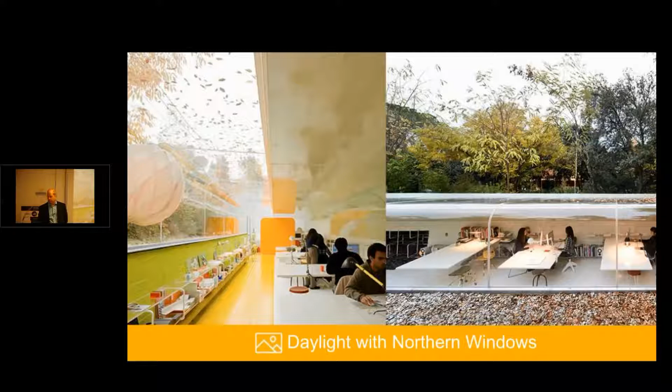If you employ it right, you can still get views. This is a case in Europe where people are able to work here most of the year without any glare, because the windows here are facing north. They will get glare at selective times in the year, early in the morning in the summer, later in the day in the summer. But otherwise, you can plan for it and also achieve a lot of benefits of the views.

So it's important to actually go beyond just saying we're going to add windows and skylights to buildings, and actually try to get it right with your other building systems.

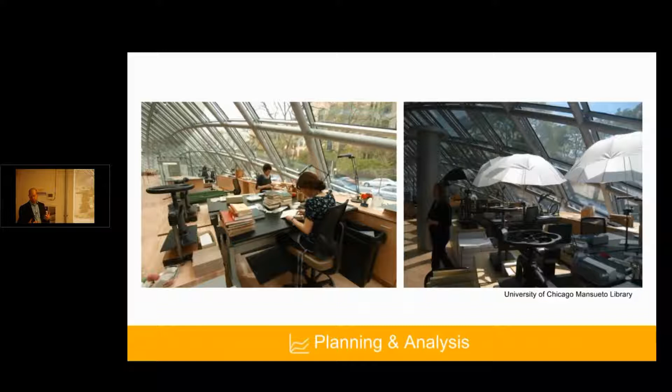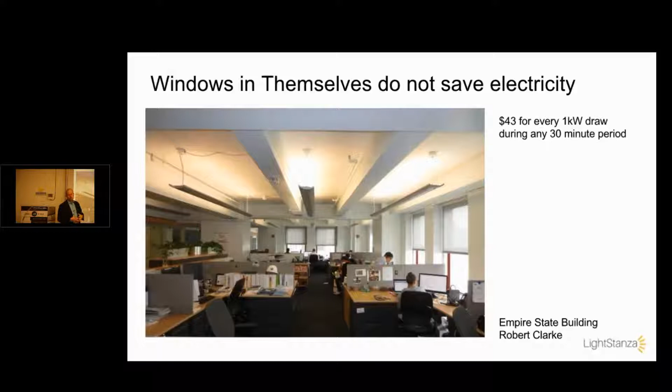How many people here know about radiance? Okay, fair amount of people. So we're using radiance for accuracy.

Radiance has certain capabilities that are just in radiance. I talked with someone at the Department of Energy a couple months ago, and he said, look, a lot of people claim they have lighting engines that can do what radiance does, but the reality is if they could do it, we wouldn't keep working on radiance. They're doing certain things like handling complex definitions of materials, BSDFs, and certain things that aren't available on other software yet.

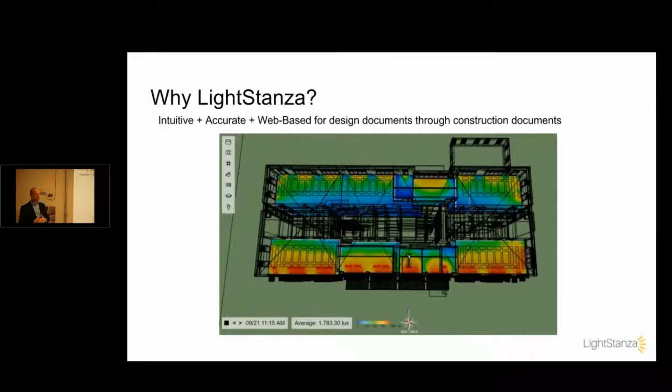So the value we're providing is we want to be as accurate as possible, and the only other things comparable to what we do are PC-based tools. How many people use PC tools with Radiance, or just use Radiance directly? Okay, so it's hard to do—the downside is they're hard to use. People are much more interested in using the web these days to do everything in life, and so that's what we're offering. There are other web tools out there, but their priorities aren't necessarily accuracy, and that's what our company does.

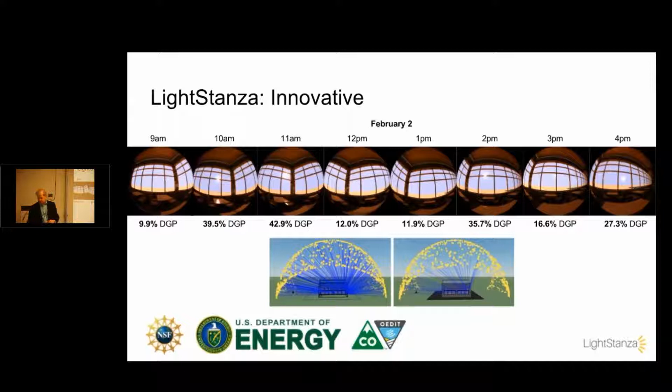A lot of different choices can be made, and with a tool like LightStanza you can put in different types of glazing, redirect glazing, different films, and look at different geometric things. There's no real limitation because we're focused as a daylight tool on geometry and materials. With energy modeling there are some other aspects, but in this way we're fairly flexible.

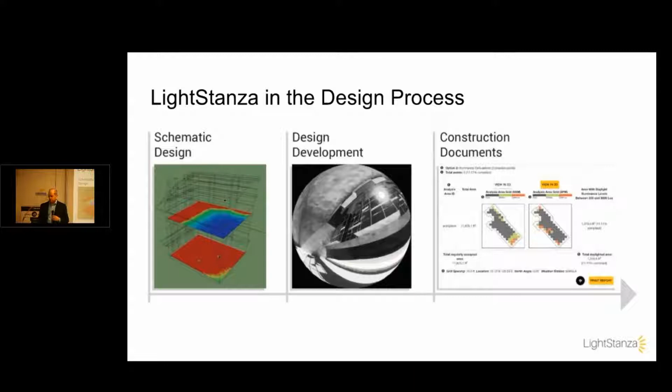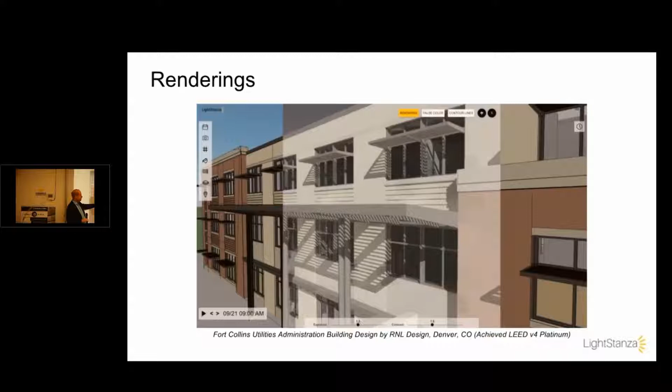So about our software, what can we do? You drop your 3D model into LightStanza. Right now we support SKP, SketchUp models, and we also just started IFC, which is an export from a tool like Revit or ArchiCAD. The idea is you drop your 3D model in, and then I'll be giving a demonstration, and then you'll be able to make renderings that go on top of your 3D model.

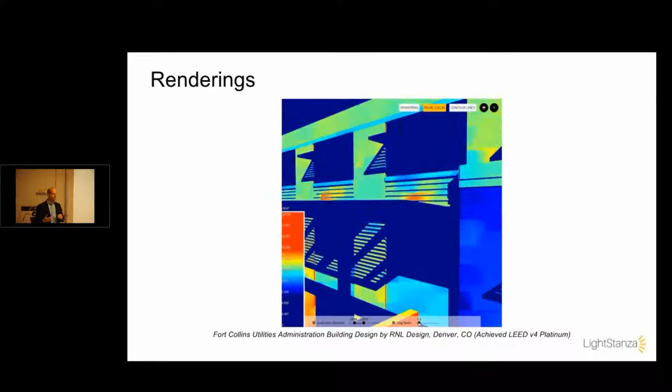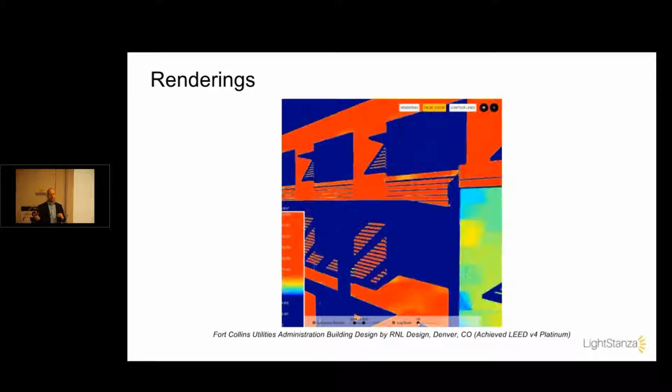You can also do false color inside your browser, so you can get a more numeric feel of your space. One of the challenges with looking at and studying light on a computer screen is you don't really know if that's what it looks like, because a computer screen has a limited range it can display. Computers are powerful and changing the world, but when you buy a TV there's a certain brightness to it. So the idea is you want to look at a false color to really understand those numbers, like you would look at a temperature map. We offer this in real time inside your browser.

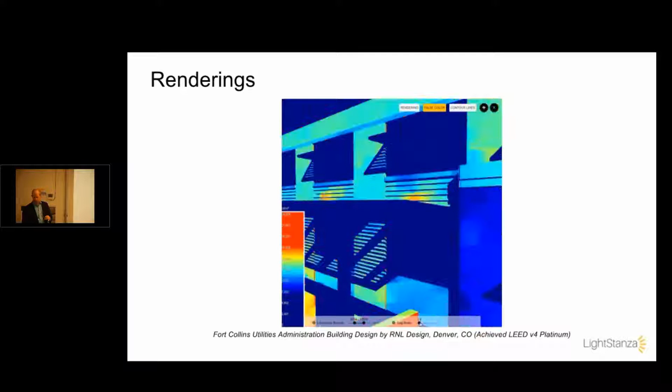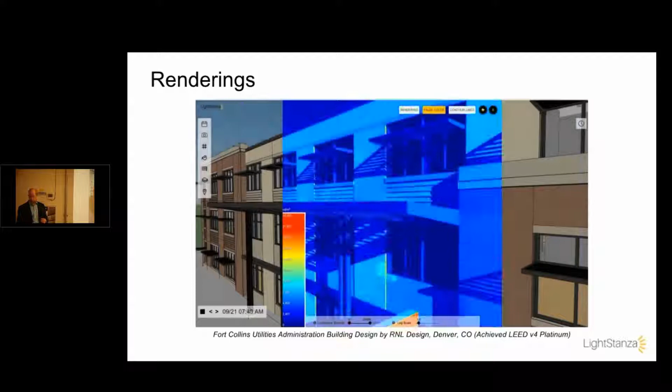You can also run animations in your browser. The idea is you drop in your 3D model, you can get this information, and you can just use your browser. You don't have to install heavyweight PC software to do any of this. Right now you don't have to install anything to use LightStanza.

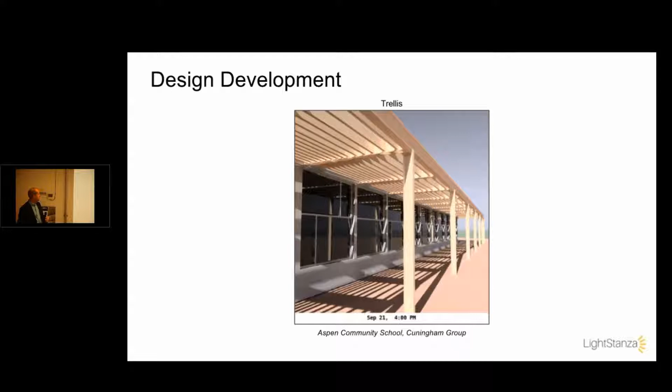You can use it throughout the design process. Here's a firm, their Denver office was working on a school in Aspen, Colorado, and in this case they were just looking at LightStanza and how you could use a trellis for it, and it looks pretty good. It's covering the window, and you can run animations in LightStanza to make sure it really is working well.

This is at the equinox. If we did this at the solstice in the winter, we'll get something different. So you can use a tool like this to really understand this, both numerically and analytically, but also just visually, and you can really see what it's doing.

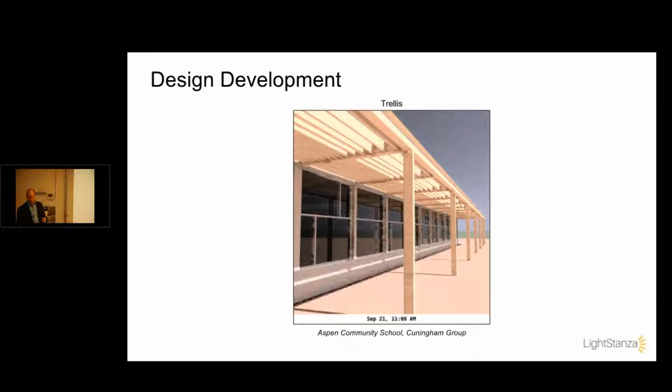Likewise, you could use LightStanza to look at different fenestration. Typically buildings have blinds or something else, and if they don't have blinds and people are irritated, then we'll put them up anyways. They'll block the glass with something.

Just drop in your 3D model, and then it will try to guess where your windows are, and then it will put blinds on them. You have the option of not seeing them because people don't like to see blinds, but the reality is if you're doing measurements, you'd want to just check and see are the blinds going to be closed at these times.

I know there's some energy modelers here, so there's some analog with energy modeling that hour by hour we look at the weather, we try to see if the blinds will be drawn or not, and from that you can come up with a more accurate prediction of how your space is doing.

This is something that, for example, USGBC requires for the LEED calculation. So one of the reasons that you may not be interested in doing calculation is that this is extremely painful to do every hour during the year. I mean, that's not a fun calculation.

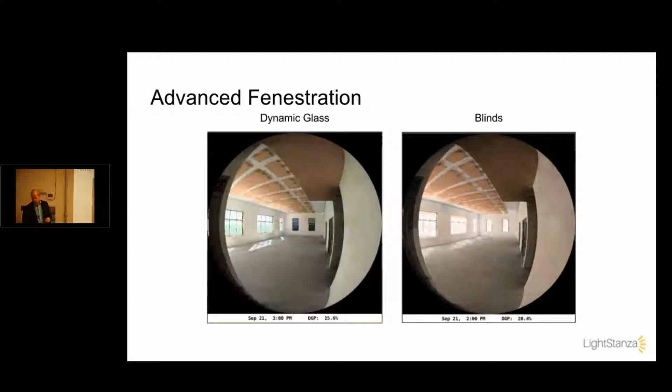So with this, the architect was able to evaluate whether or not the trellis was worth it. Trellis, older technology; newer technology for the classroom, we put on some dynamic glass so they wouldn't have to deal with this overhang. And you could use LightStanza to figure out the cost benefits.

As we all know with design, there's often different arguments typically on what's better. In this case, on the left-hand side, you can make a rendering. I picked this time at 11:00 a.m. on the equinox, and you could look at the glare being reduced with the trellis, and at the same time, the glare is actually being reduced even more by the dynamic glass.

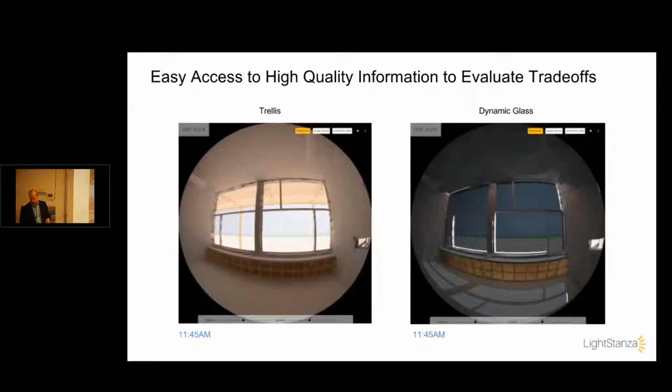And so this is actually what the building looks like in Aspen today. So they picked the trellis. But I think dynamic glass is a great technology.

This is the same building. So looking at the building in 3D, you can see vertical sections, or you can make vertical grids. In this case, the architect was concerned that teaching is going to be interrupted with glare. Because students are going to use this atrium to sit on and teachers are going to talk, they wanted to measure whether or not there'd be too much ingress of daylight, and that would be distracting and hard to work with. So in this case, they ended up frosting the glass, so it would diffuse the light.

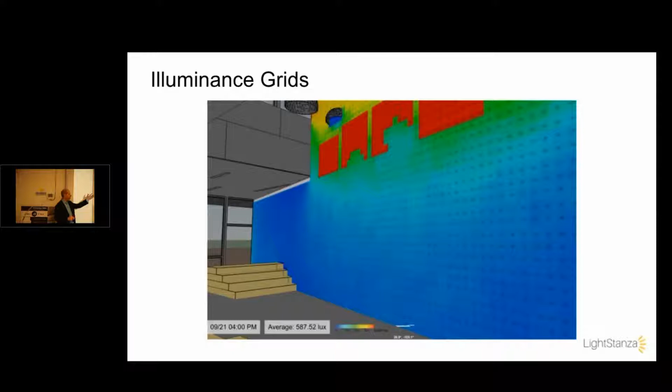With LightStanza, you can actually use different types of materials—clear glass or frosted, some type of translucent materials—and get different results. This was something to help inform them that they would have glare in those clerestories, so they would frost the glass and not have those problems later.

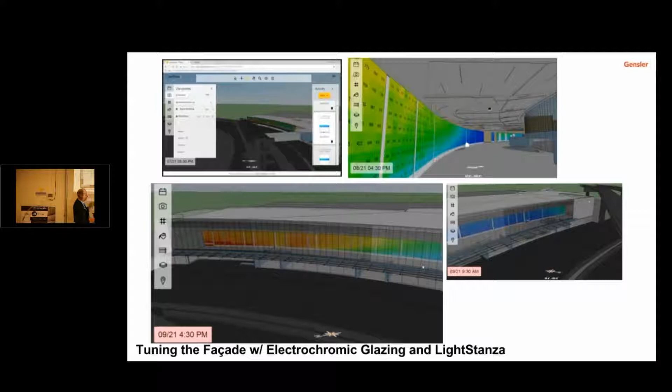Likewise, this is a building—this is actually the San Francisco airport—and dynamic glass was looked at in LightStanza by Gensler. They were concerned that this is kind of a north-facing facade, but after studying it some more, they saw it was curved, and it kind of became northwest and northeast-facing. By having those facades, you do get direct sun, and they weren't able to work off the facade with like a trellis or anything like that.

They were constrained, so they were able to use LightStanza to really understand the value of some sort of more advanced system. So just as I said previously, the trellis in that case sort of quote won out—in this case, this has provided them good evidence. These are big projects, and as you guys know, there's a lot involved here, and you don't want to have a great design being value engineered out, because you can actually show evidence of how this is reducing the heat off these big facades.

Yeah, it's—oh, okay, cool. Okay, great. Good person to have here.

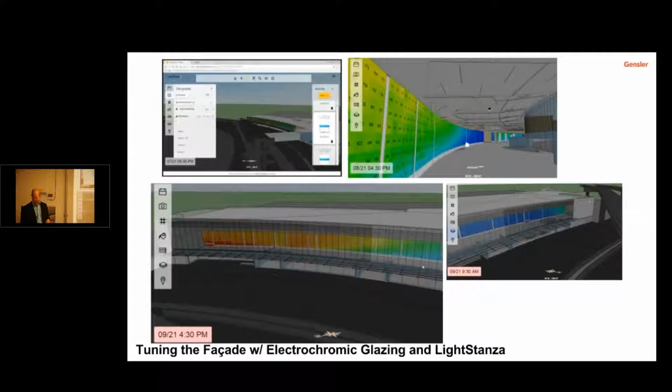And these reports, you can be compliant through option 1 or option 2. We actually run both options for you, just so you can have them both, and then you can pick, and both of them will tell you what your score is. So if your score for option 1 is 3, that's going to beat out any option 2 score. If your option 2 score is looking good and your option 1 is 0, then maybe we want to encourage cutting edge simulation—that's option 1—but option 2 is somewhat of a legacy option. Sometimes buildings will be scored better on option 2.

Dylan and I were at a workshop when we saw a LEED v4 workflow that wasn't using LightStanza, and it was a lot harder. You had to go through these different steps on the left and on the right. In order to generate accurate results, they had to use text files. I mean, it was really a lot—it looked like a lot of work to get the accuracy that this consultant wanted, and it looked like they were just using option 2.

So again, people that care a lot about accuracy, it's a lot of work. I think that's why people don't do these LEED daylight reports. That's one of the reasons, because to do them correctly, it's just a lot of coding, so to speak.

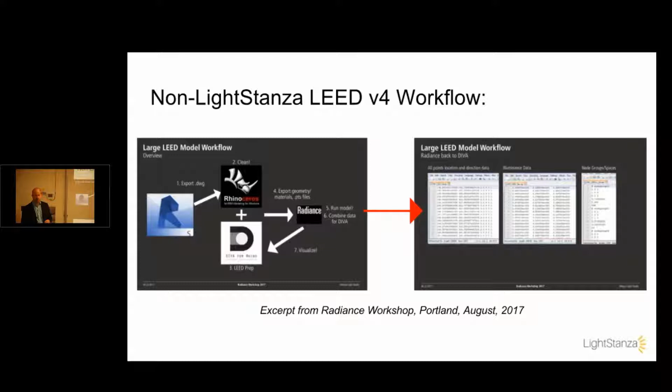Real quick with annuals, this is a project worked on by Point Energy Innovations in the Bay Area, San Francisco. He used LightStanza to look at some of the key LEED metrics to understand whether or not they're getting too much solar exposure, and if so, looking at overhangs and how to reduce the solar exposure, and also whether there's enough daylight, looking at the spatial daylight autonomy of the building.

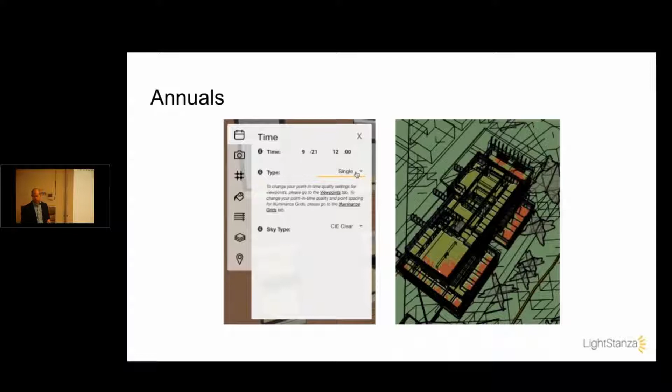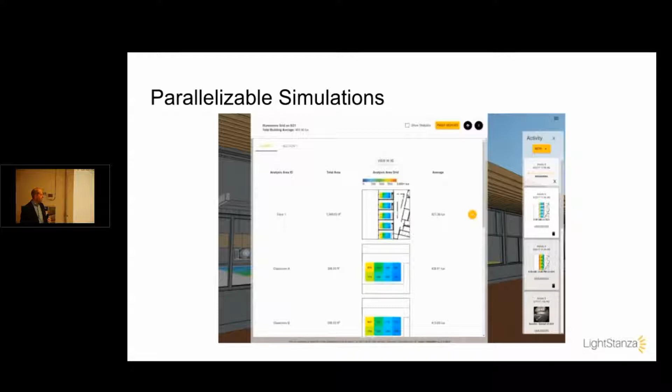Lastly, we're a web-based tool, so we run quickly. We take the data and process it on our servers, and you can run multiple things. You can close your laptop, close your workstation, and they'll still be running. We try to put multiple servers on your project, and we have different tiers of service on our website. You can just continue to work and not get slowed down.

So from there, I'm going to hand this off to my colleague, Sydney, who's presenting remotely.

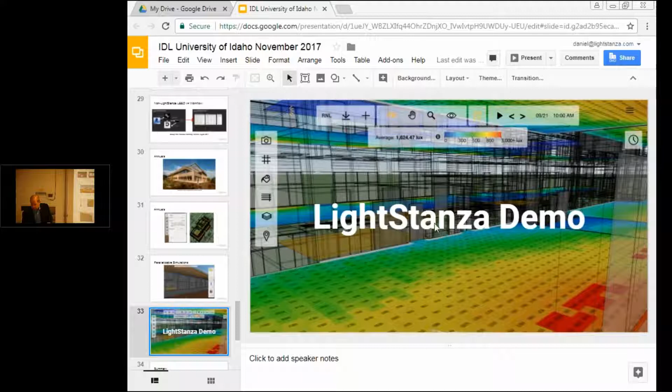Hello, can you guys hear me? Hello? Yeah, we can hear you here. Cool, alright, let me show my screen. Sure, okay. Alright, is everyone able to see my screen? Yes, Sydney. Okay, and do you see the app up? Yes.

Okay, great. Alright, so my name is Sydney Nelson. I am talking to you all from Boulder, Colorado, that's where the LightStanza office is. And I'm going to try to show you how to get the results Dan just went through, from start to finish, in a quick demo of the app.

So I'm going to use a model that I've already run a few simulations on. This is the Fort Collins Utilities Administration building, and it just recently achieved LEED v4 Platinum. So we were excited to work with them on such an exciting project. This was RNL Design in Denver, Colorado.

So I'm going to open that up. I'm on app.lightstanza.com, and the first thing I do is make a design and enter that design. Let me get that loaded.

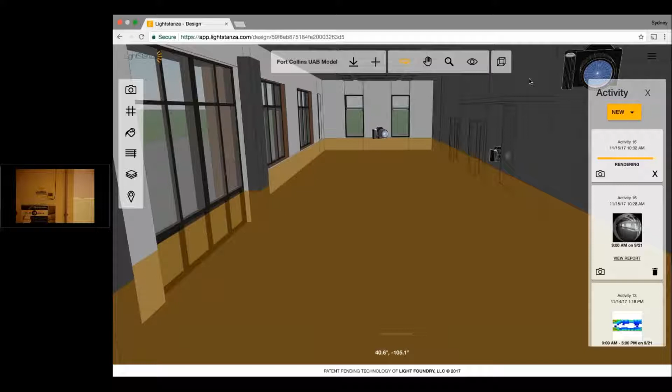So the first thing you'd want to do is upload a model, and that's with this button right here. I've already uploaded a model, as you can see, but Dan mentioned we can upload SketchUp, Collada, or IFC files. That would be SketchUp, Revit, Rhino, ArchiCAD. You also have an option to upload from a sample model library if you don't have a model available.

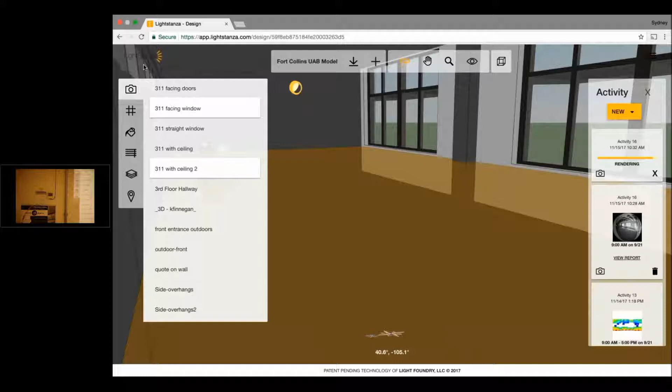Basically our app, or the design page, has different sections, let's see, three different toolbars. So we have our left toolbar, our top toolbar, and our right toolbar. And I'm going to demo this separated into those three parts.

So the top toolbar, this is just going to be our design name, you can change it here. Once you've uploaded a model, you can download it back to your computer. And again, this is where you can upload a model to LightStanza.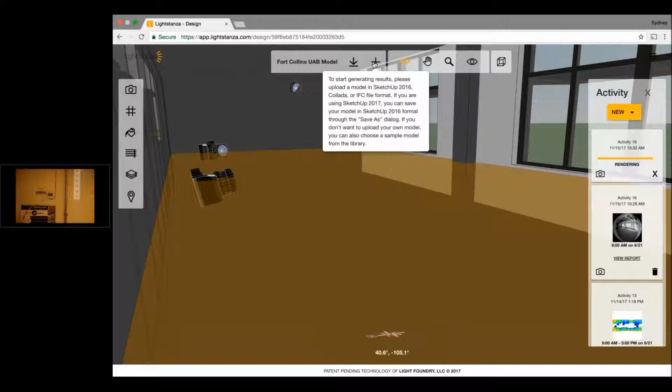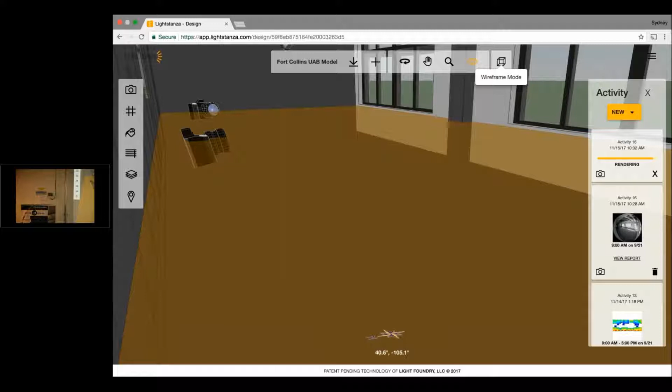This little box right here is how you can navigate the 3D viewer. So there's rotate, pan, zoom, and then just a look around. Look around is good for looking around a room. And another useful one is the wireframe mode, which is really useful when you're looking at data in your 3D viewer, and I'll show you how that works in a little bit.

The next part, and this top toolbar, is going to change a little bit throughout the demo, depending on what data I put into the screen. I'll do my best to explain what additions there are to this top toolbar.

But now I'm going to go to the left toolbar, and that is basically how you can edit your model, so it's your model settings. The first tab here is the Viewpoints tab. These were just uploaded from SketchUp, or they can be uploaded from Rhino, and they're basically scenes or viewports.

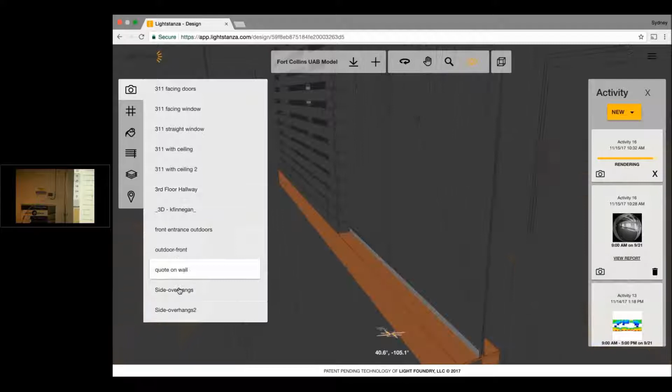You actually don't need to make these in your CAD tool, but we do upload them. So basically what these will do is just bring you to the spot in your model that you made a scene, for example. They're good for making renderings, and I'll show you how to do that in just a little bit.

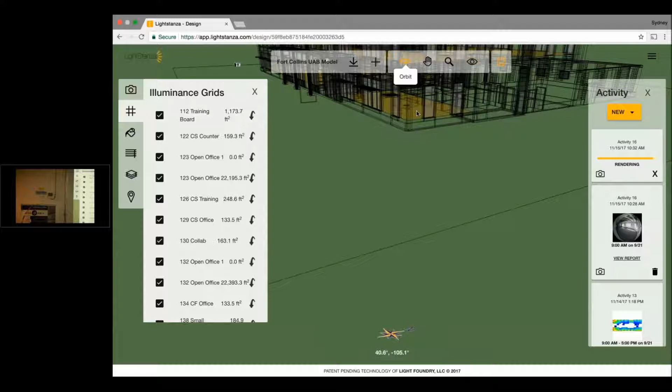This is our illuminance grids tab, and just like the viewpoints tab, you don't need to make any illuminance grids in your CAD tool or 3D modeling tool. LightStanza is able to make these for you upon upload. We'll do an intelligent guess where we think your illuminance grids should be, and as you can see, as I scroll over these, some of them will highlight, just connecting the list with what's in your model.

Another thing you can do in your illuminance grids tab is turn them on and off. So if you're making a LEED v4 scorecard and want to turn off your unoccupied spaces, just click the check here and it won't be part of your simulation. We also have a flip grid that'll flip it upside down - you want to keep the yellow side of your grid where you want to measure light.

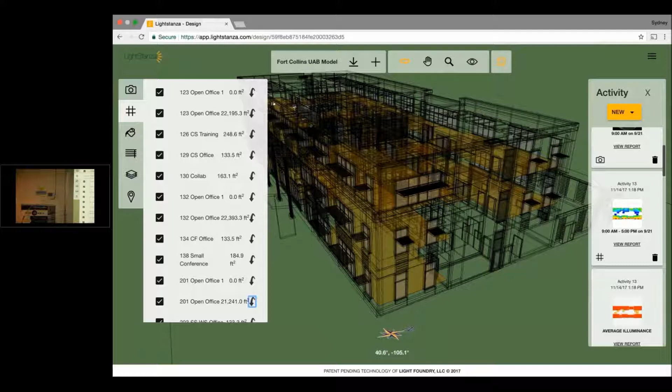I guess I should mention, if it wasn't clear, the illuminance grids are basically just where you're going to measure light. So, for example, just a regular illuminance grid annual metric, but I'll go over that in just a moment.

The next tab here is our Materials tab, and basically we have two sections. It's in Design, and that's going to be what's in your model currently, and you can see as I hover over these materials, it shows you where they are in the 3D viewer.

But if you want to go into LightStanza and apply more daylight materials, you can click on Material Library. We have a library of materials here - just regular glass, opaque, some translucent materials, then some more complex glazing like daylight redirection film, frit, etc. So let's say I want to add dynamic glass to my model and see how that works.

Maybe I want to try dynamic glass instead of overhang. So I just clicked it and it brought me into the design. What I can do is use this paint bucket tool to apply it to a window. But you can see it would be pretty tedious with this model to apply it to every individual little window pane. So what I would do in this situation is go up to where it says what it is currently, which is double pane glass, click Select All, and then apply dynamic glass that way.

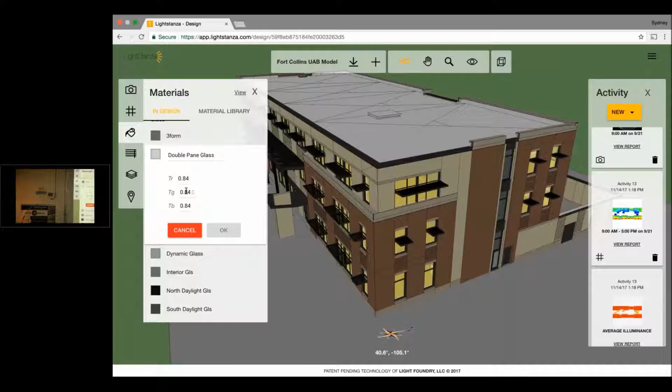Another thing you can do in the Materials panel is edit the materials. I think a few of you work with Radiance properties, so you can either edit the materials in a simple form, or you can click View, Radiance Format, and then get a little bit more detail and edit them directly, click OK, and that's going to change the properties of your materials if you want to get really custom.

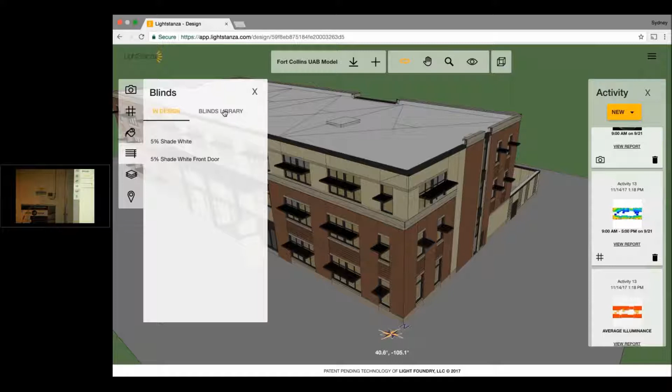You also have a Blinds tab. LightStanza automatically adds blinds to your model upon upload. In this tab you can change the blinds material, or change the properties of your blinds. We have it set to dynamic, so that will open and close based on that 2% direct sunlight rule set by the USGBC for the spatial daylight autonomy calculation, but you can use it for any type of calculation. If you don't want to use your blinds, this is where you'd say always open, turning them off, or always closed if you want to look at your performance with them always closed.

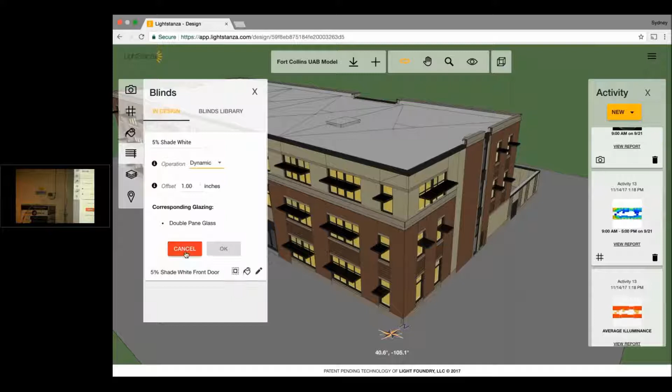Two more little tabs in the left toolbar. We have our layers - if you have a model with a lot of layers, you can just turn them on and off in this tab. If you turn them off, they won't be included in your simulation. This is good for things like turning overhangs on and off or similar.

And then there's our Site tab, and that'll just be where your model is located and its north angle, as well as the climate station that's associated with that model location.

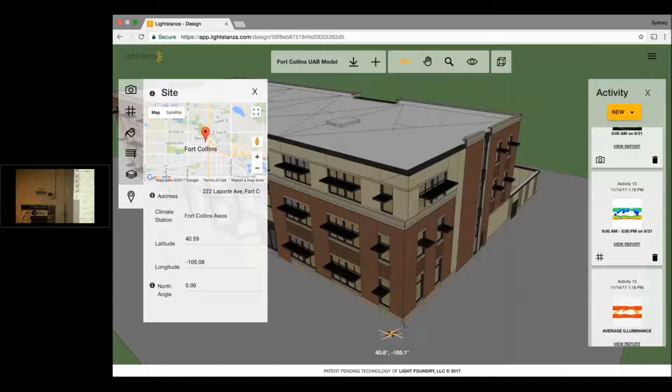So if you do a calculation that uses weather data, you're going to want to make sure that your model's in the right spot, so it's pulling from the right climate station.

Alright, so the fun part is the right toolbar, and that's the activity bar. Let me move this out of the way. The activity bar is basically where you can make new activities, and here's a list of the different activity types you can make.

You can also check the status of current activities, so you can see I have a really big simulation running right now. You can cancel it, I'll just show you, you can cancel a simulation here. You can also go through and look at previously run simulations and click on them.

You can then view them in the 3D viewer, or view them in report style. Let me show you, so let this fill the 3D viewer. It's taking just a moment, it's a big model. What I'll do now is take you through each of the different simulation types that you're able to run.

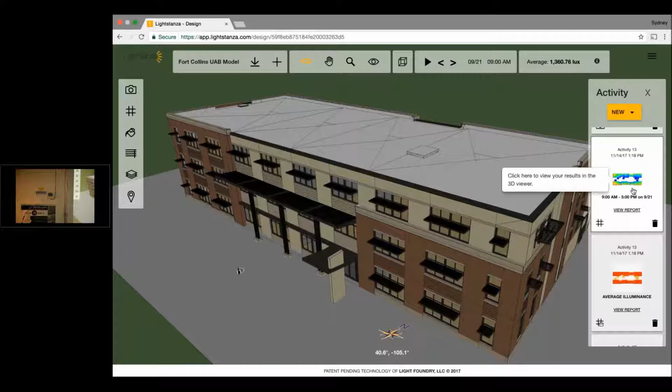I'll start with rendering and animation. If you want to make a new rendering, it's going to take the exact position and angle that your screen is at right here, so it would basically just take a photograph of your viewer. So if I wanted to, let's turn this on.

If I wanted to make a rendering here, I'd have a few more options before clicking Start Simulation. You can choose the quality: draft, high, very high, and these are based on some radiance quality details. If you really want to make it custom, click Show Quality Details and you can edit all of these individually. I'll just keep it on default for now.

Then we can adjust the quality of our rendering, so super sampling and resolution, you can adjust those. For example, the resolution, you can change the pixels all the way up to in the thousands.

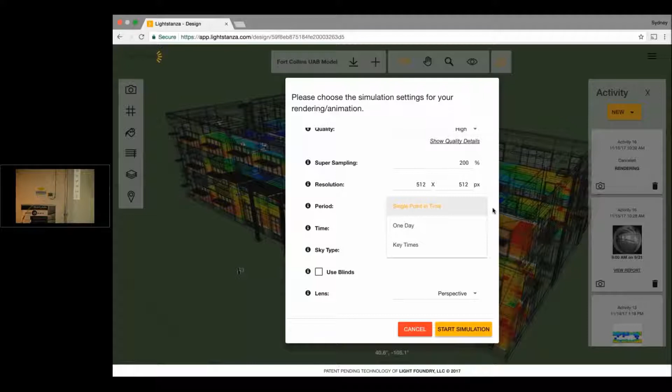And then something that's very important to pay attention to is the period. If you click single point in time, that's going to generate just one rendering at a specific time, and that time is going to be what you set right here below it.

But if you want to make an animation, you can click 1 day or key time. So for example, if I want to do 1 day for a range of, let's say, 9 a.m. to 6 p.m. for 15-minute intervals, I could do that. I'll show you kind of what that would look like in just a moment.

The other options are the sky type, so clear, overcast, and like I mentioned with the site tab, if you want to use climate, make sure your model is pulling from the weather station you prefer. Then a few more options: use blinds and lens. For lens, you can choose between perspective and hemispheric. Perspective is just kind of how we view it, and hemispheric is like a fisheye, which gives a more accurate representation of glare with the daylight glare probability score.

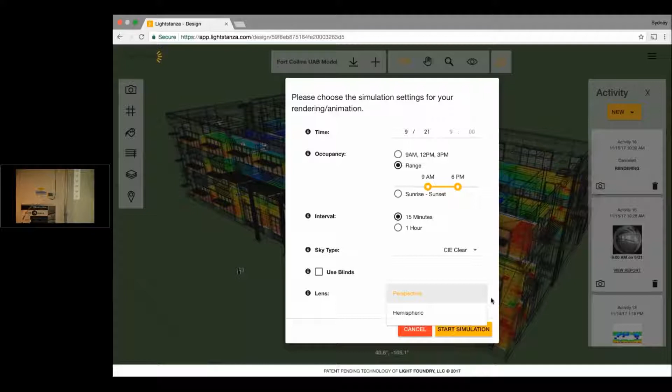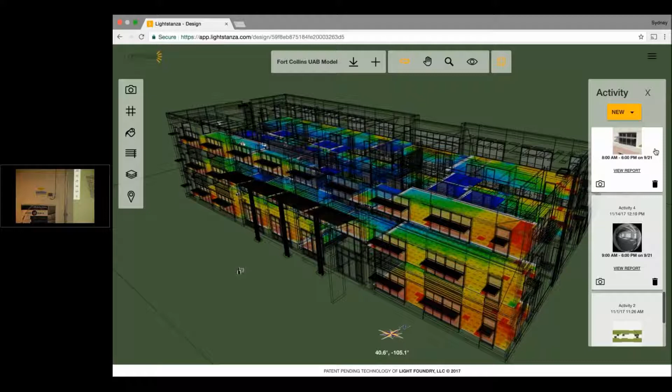I've already run all of these simulations for the sake of time, but if I was to click Start Simulation right after that, I would have gotten something like this example. We'll let it load. As I mentioned before, this top toolbar is going to change as I change what's in the 3D viewer, so I'm loading in an animation, and that's going to add an animation toolbar.

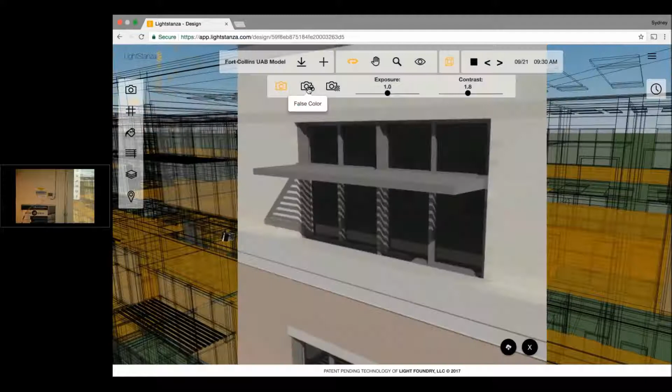So there's a play button right here, back, next, and the time that your point in time represents. We also have a set of camera tools. Dan showed you something like this in his presentation, but here's that false color that he was talking about. If you want to focus in on really specific levels of light, you can change the luminance bounds or log scales here, and then a different way to look at it is with contour lines.

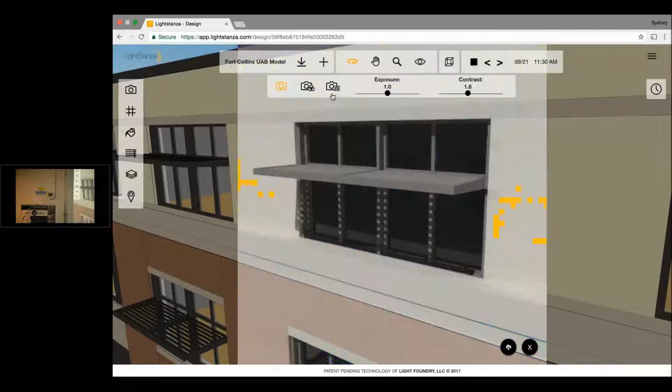So another type of simulation you can do is an illuminance grid. We have point in time and we have annual illuminance grid.

So I just clicked grid illuminance, and very similar options to the renderings, but for the illuminance grids, you're going to want to pay attention to your point spacing. We'll try to guess what a good point spacing is for a fairly quick simulation, but you can choose whatever point spacing you'd like.

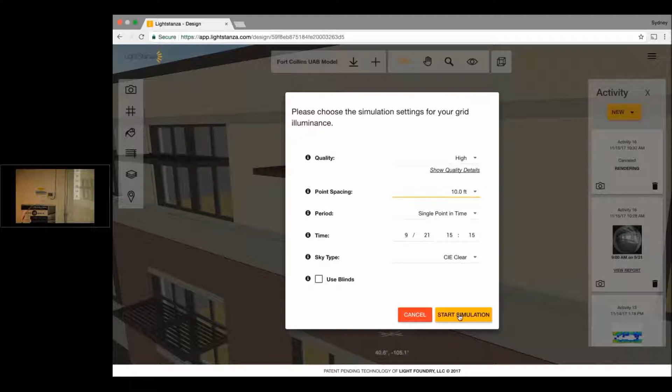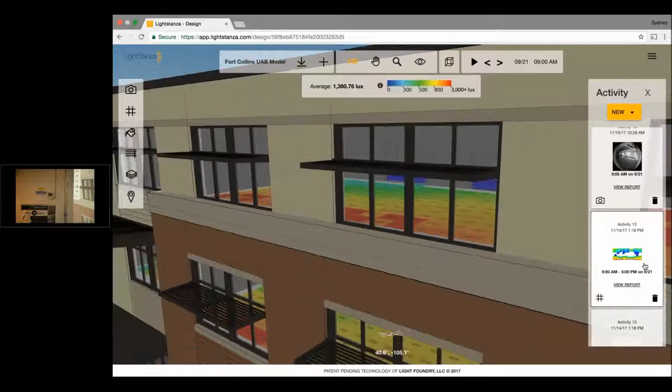And then again, click Start Simulation. You can do animations or individual point in time with these as well. I'll let that load. So here's where that wireframe mode is useful. And here it is, I'll click play so we can watch it animate.

Get to a good position here. Like I said, the top toolbar is going to change a little bit. So here you can see the legend for your illuminance grids will change depending on what you have in your 3D viewer, and you'll get some more numbers here. For point-in-time illuminance grids, you'll get your average lux values.

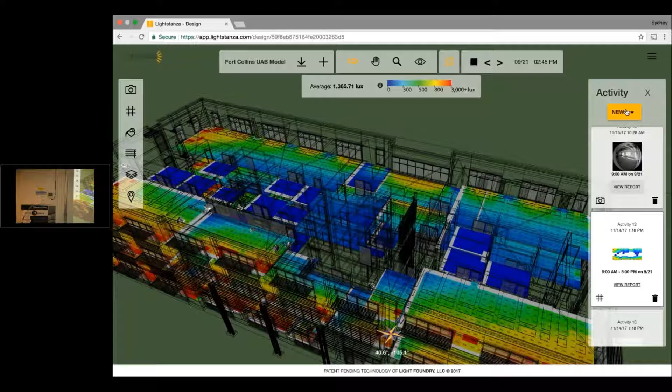Another simulation type is the annual grid illuminance. That's basically very similar to the point-in-time grids, but you have 6 annual metrics to choose from. I don't have much time to go over each one, but we do have documentation online at lightstanza.com, daylight terms and metrics, as well as our help guides, where you can read about every single one and how we show them.

For each annual metric, you can choose between 3 and 5 phase. We definitely suggest 5 phase, it's the newest method for calculating annual metrics and the most accurate. You can change your occupancy for each day - for example, maybe a hospital might have different occupancy hours than a school. And then a few other bounds that you can change depending on what annual analysis you choose. So you can really customize these to get the information you need.

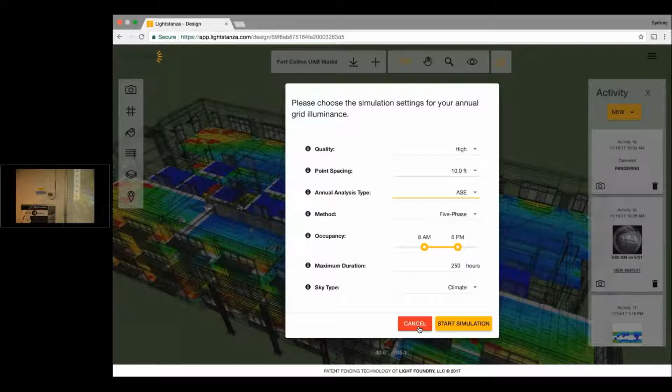I have run all of these before, so I can at least put them in the 3D viewer for you right here. And I should say that you can also view these outside of the 3D viewer in a report format, and view individual spaces like this, download, print, whatever you need to do.

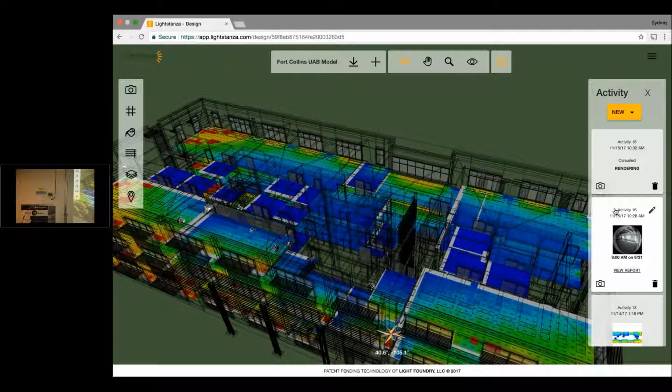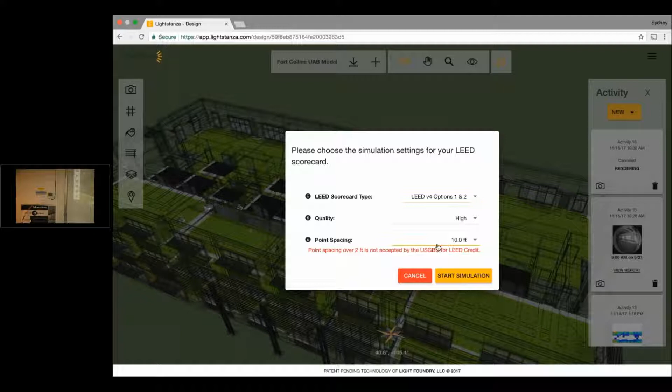We have two other different types of simulations you can do. We have the LEED scorecard. With your LEED scorecard, you can do LEED v4 option 1, option 2 - you can run options separately - or LEED 2009 if you're still working with that. Quality and then point spacing again - you're going to need to go under 2-foot point spacing for a LEED credit. And then we have our daylight factor for those overcast climates.

So I will show you quickly a LEED v4 report in LightStanza. We'll click right here. This is a pretty complicated report, so that's where these tooltips are pretty handy. You can find these little i's all over the app, and we do our best to give you as much information as we think you might need.

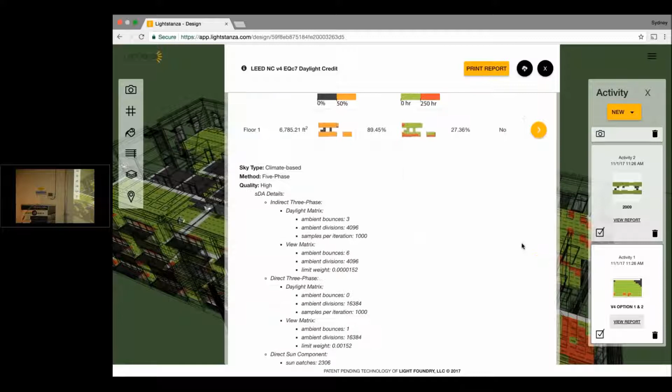But don't forget to hover over these whenever you're using the app. This LEED v4 scorecard, as Dan mentioned, is going to have option 1, which is spatial daylight autonomy and annual sunlight exposure for possible points, and then option 2, which is going to be 9 a.m. and 3 p.m. on a clear sky day near the equinox.

And each one of your reports is going to have a big list of details that you might want to check. Again, for any results that you generate in LightStanza, you will be able to find a download option.

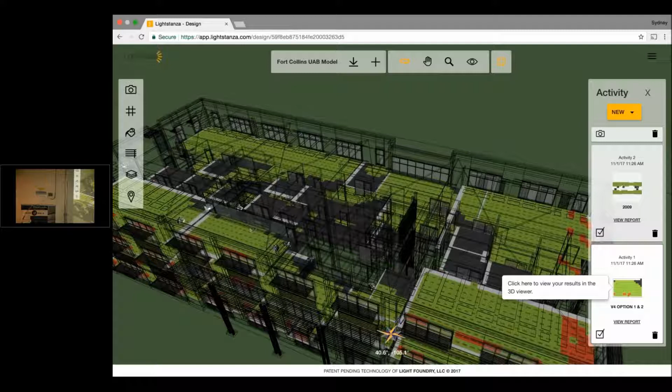Let's see, one more thing - we do provide SVGs for any of your illuminance grids. So just go into your report, click on one, and you can zoom in and get the actual data points.

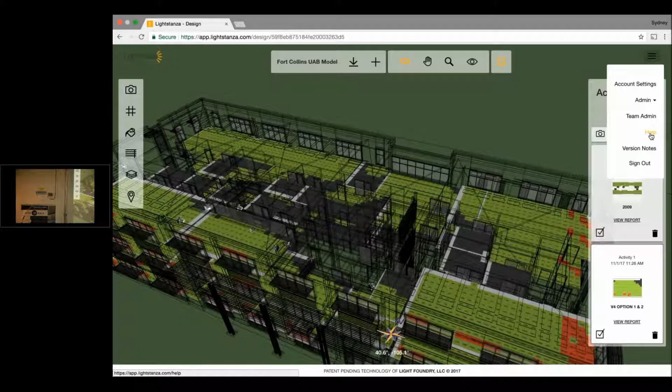So I know I went through everything very quickly, so I'm going to hand it over for questions right now. But before I go, on LightStanza there's always help right here, and hopefully that can at least help get you started with LightStanza.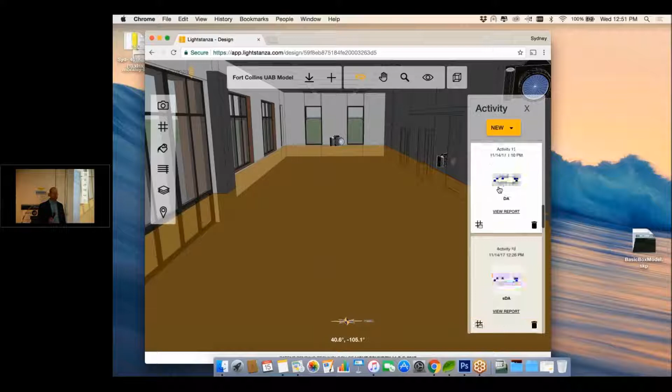Right now you would probably need a tool to use before this to do those things. Right now the way you do it in LightStanza would simply be with something like layers. So would you want to do that programmatically? Is that your main interest, or would it be in actually trying two different sizes - you could put two different walls in your space, and turn the layer off or on, and that's how you would do it. So that's how we currently do it, and we can talk after about any other ways you're thinking about it.

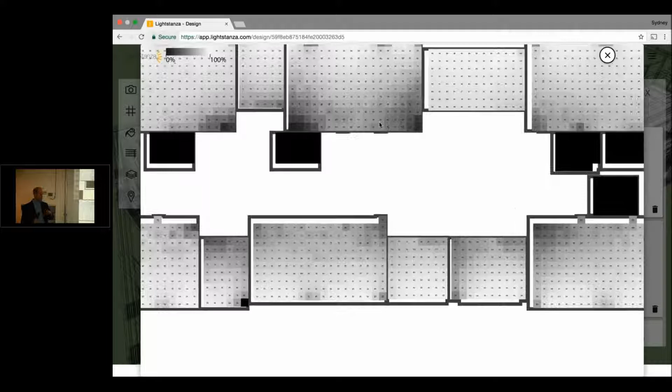Okay, yeah, I think daylight's hard. I think often when I see people programming things and saying, well, I've made the optimal daylit building - going back to that school where you have an electrochromic solution versus just an old school overhang with a trellis - some of these decisions get to be non-computable.

I mean, how many people feel you can make arguments? How many people think the trellis wins? That's a definite winner, the trellis in this. If people can remember that school, how many people think that the dynamic glass is a definite winner? Okay, how many people think it depends on other things?

So the concern I have about automated systems that just tell you the optimal daylight and build it for you, is that it may be racing faster or slower than your designers are working through the problem. But we do have people using layers right now to try out different configurations quickly.

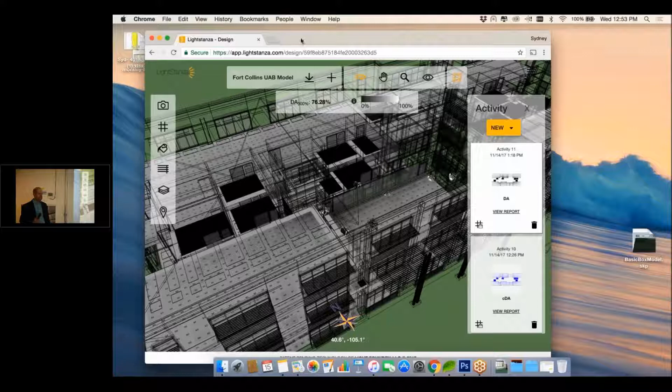Other questions? What's the typical turnaround time we get back? Great, so the question is what's the typical turnaround time. It'll depend on multiple things - good question. I'm going to give you an answer that has different...

It depends. So turnaround time is going to be great compared with a desktop computer. That's the short answer. The longer answer is it depends on what you're doing. If you just want to make a rendering, that'll come quicker. If you want to do a full building analysis that does annual calculations, looking at blinds in every position hour by hour depending on your facade, that may take a couple hours.

And we offer different classes of service. If you sign up, there's a free tier, then we offer a pro tier that gives you twice the computing power, and an enterprise tier which gives you four times that computing power. So it's a bit nuanced.

To be honest, certain jobs that are just hard may take a couple hours, but a lot of jobs will finish within 5 minutes, and some in seconds, depending on the complexity of your model. If it's just a shoebox model, you can get some information very quickly out of it. But yeah, that's a good question.

You mentioned electrochromic glass. With electrochromic, but I hadn't heard yet about thermochromic. I think I know what that means, but could you talk about that? Yeah, so thermochromic glass tints just based on the heat on the glass.

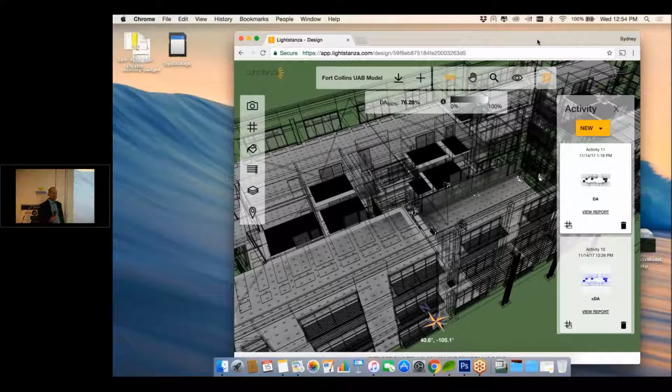And so it's a simpler technology, which has advantages and disadvantages. It has the advantage that you don't need electrical wiring to it—it's just a film you put on. And the disadvantage is that it's heat sensitive.

So in Colorado, for example, in the morning when we go to the office, we have an east-facing facade, and it's winter, and there's snow on the ground, and it's really cold outside. We'd want that facade tinted immediately when we come in, because it'll be really glary in the morning—we'll have sun in our eyes. So it may not respond as quickly as an electronic system that can sense the sun and immediately change it.

And so I think it's more affordable because there's less stuff to make it work. There is a manufacturer, Raven Window, actually in Denver, and I know there are other manufacturers that produce that technology. So yeah, it has some strengths and weaknesses compared with electronically controlled glass.

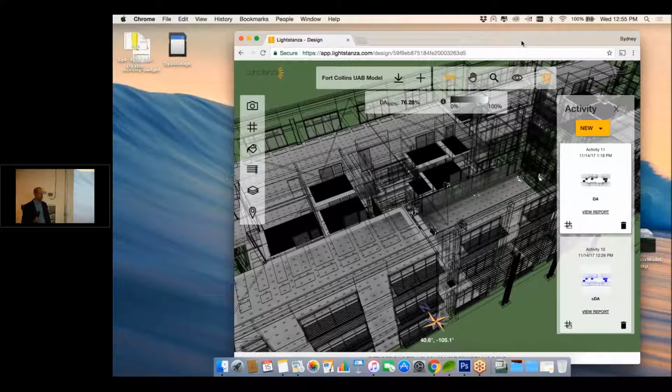So good question. What we want to do with a generic is just simply provide a generic so you can make pretty informed choices versus the alternative of not having a tool like this. It's just really hard, I think, to model.

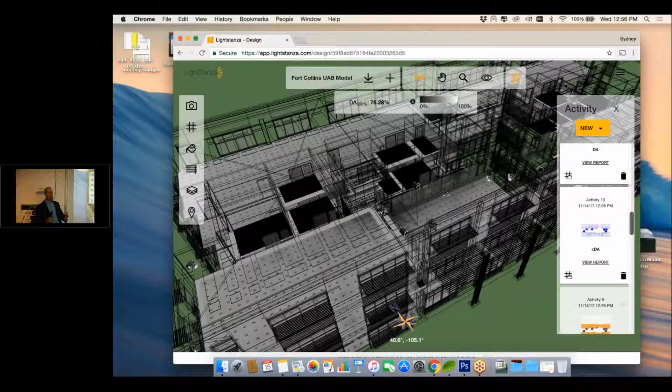And we typically see people—we want to make this process simpler and easier, and we hope people here will embrace more daylight modeling. How many people here do daylight modeling right now, or how many people think their life could be easier with this?

That's the hope. And if people want to take up our trial, you can also talk with our sales team, and we'd be happy to give you 25% off, like an annual subscription, if during this month you think it's a good thing for people here or even online.

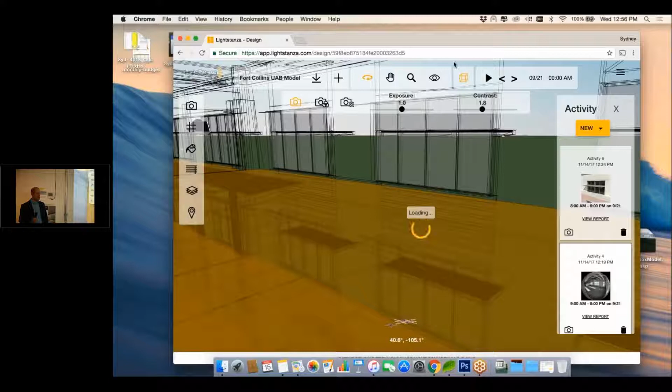We really want to encourage daylight modeling. It's always surprising for me to see that there are so few people going after daylight directly. We feel that it's really desirable, but it's kind of perplexing to me that there hasn't been as much uptake. When I look at the USGBC, when people go for their points, daylighting is rarely gone for.

We hope that this will reduce a lot of the barriers for doing the modeling, and that you'll see the benefits that we talked about in the beginning.